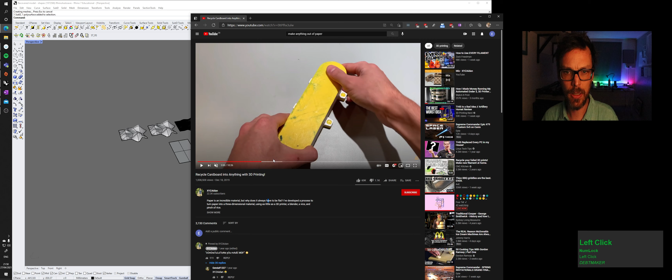I can't quite remember when that is, I think it's a week on Thursday now. So I need to make sure these are ready, and if you do want to have a play with this, then we can certainly investigate it.

Following this guy's video, it's quite informative, one of those simple ideas executed very well. Looking here, he's got a three-part mould: a lid, a base and the sides, and the base is attached with these pins. He's alluded that the material shrinks. We don't know what our properties of materials are going to be until we have a go.

The resolution is pretty tight, you can see the layer lines of those 3D prints coming through, so quite excited about trying this. The other thing he talked about was the thickness, because these things break. But going ahead, we don't really know what to expect until we give it a go ourselves.

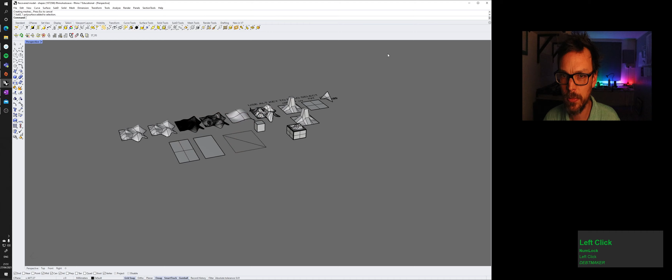So what I'm going to have a go at here is just minimize him. We've got our objects that we played around with in the studio session, so what I might do is another rebuild of that and see what we've got.

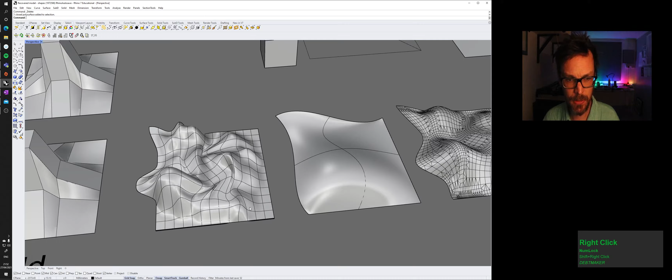I talked about using a shape like this, making it maybe a thickness of 15 mil or so, which is what I've been told. It needs a decent chunky heft to the mycelium in order for it to take its shape. So without further ado, let's just nuke all of those.

I'm going to draw my rectangle, and I'm going to start at 0 and hit it up at maybe 100 by 100. Okay, zoom select, and you can see I've got my shape.

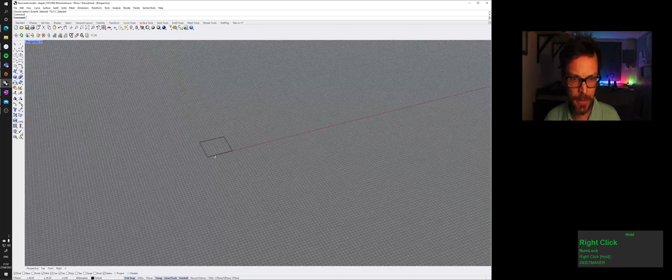Let me just double check with F7 that my grid is the correct orientation, so red should be going along and green should be going up. Again, I seem to be in large objects, don't know why, but nevertheless. What viewport am I in? Shaded. Let's try rendered.

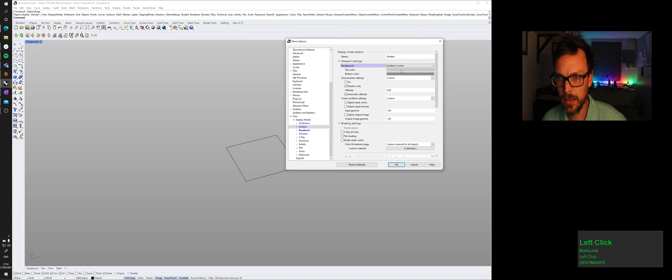Oh yeah, I messed about with these, didn't I? So if I do advanced display, I can change shaded. Let's do gradient, and I'll match the colour of my text down there, my ticker. Was that a top colour? Let's inverse that. Dark grey to green. There we go, let's be super fancy and actually use the right one. Look at that, it's looking good.

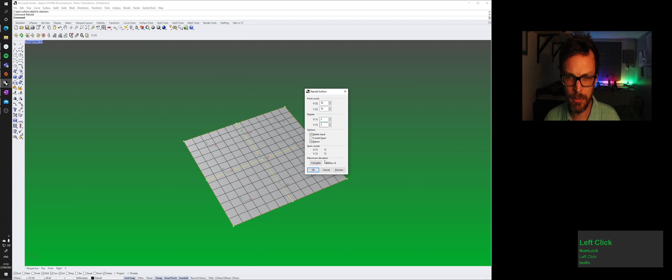Okay, so to get a surface on there, I'm going to use planar surface, and I'm going to rebuild it. What did I use, 16 before, with a degree of 3? The degree 3 will make sure that those curves are nice and curvy. So now I've got my UV curves plotted on my surface.

I'm going to turn points on, which is this guy over here on the left hand side, or I can hit F10 on the keyboard. Again, if you've got a PC, Mac, keyboard or laptop, those F10 keys might be shared, so you might need to use a function key. Going into my different views, we want to make sure that we are selecting the right shape, so I can do that quite easily in the top view, as I am enabled to select.

But if I want to do that a bit more on the fly, I can use the Alt key and click and drag, and that won't select the surface, and I can move those up. Got a bit of system lag there, it's a bit disconcerting.

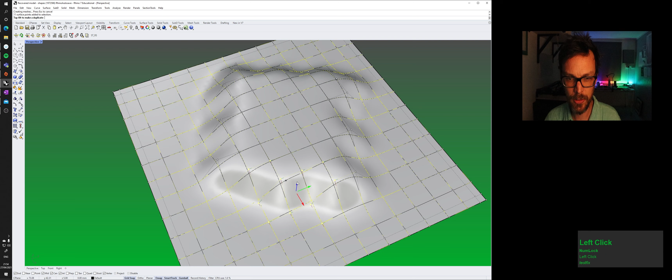Okay, my grid snap is on, so I'm going to turn grid snap off, and that might give me a little bit more. Maybe what I thought was system lag was actually snapping millimeter to millimeter. I'm going to try and keep the edges square. We shall see if we're able to do that using a few different tools later.

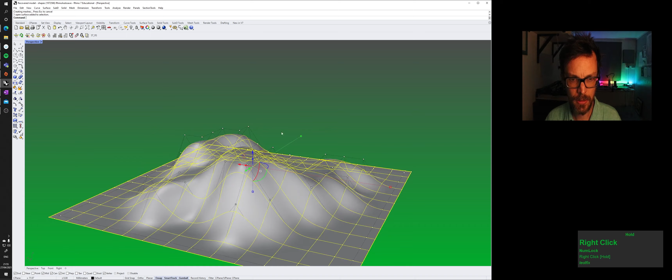Yes, that might work. I don't really know what this is going to look like. Obviously, when it comes to growing the mycelium in it, I've never done this before, so let's see if that actually works out for us.

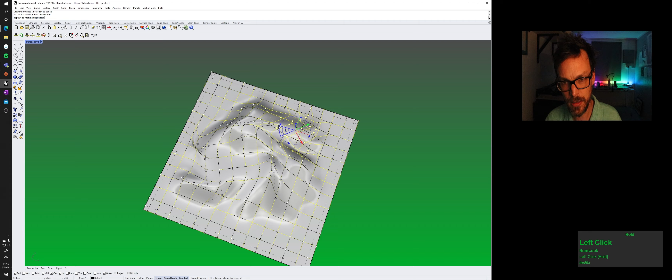The other thing I can do is a few rotations. These look pretty sweet when they've been rotated. Yeah, it's looking pretty tight.

Right, this guy is going to be a problem because you can't really have overhangs when it comes to this process, so drag that out. It's quite alright to have those sharp kinks, keep those in. See how we get around playing with that, and I might want to go down a bit actually in a few of these areas.

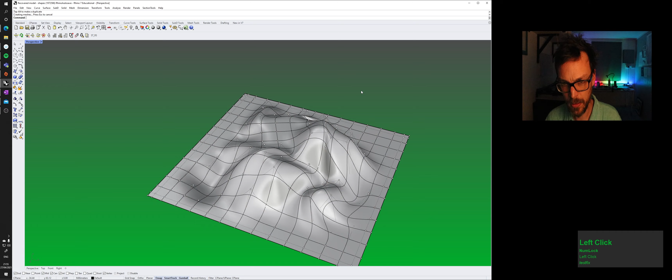So looking back at what we played around with today, we want to make sure these edges are perfectly zeroed. I'm going to select those boundary points by dragging left to right, then make sure they are flat on the Z axis using Transform, set X, Y, Z coordinates, set to Z, and drop that back where they are. Just click on there, and in theory they should be completely flat.

What we might do here is turn the points off with F11, or points off which is right click on the icon. And we can rebuild this perhaps.

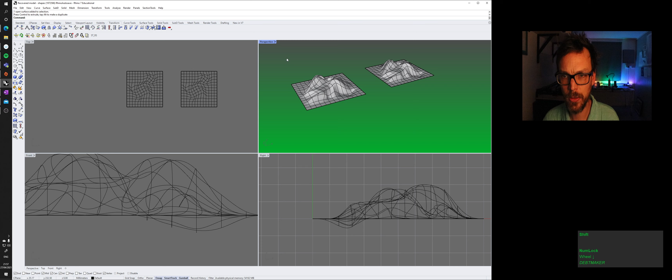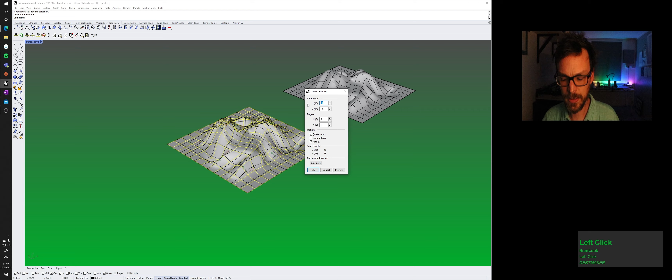So what could I do on this? As I said, rebuild and go from 16 to 8. Oh, we've got that much softer, smoother profiles, which I think both of them have their merits, don't they?

Which one shall we use? I'm going to use this one. I might just have to double check that those edges are flat again after doing that rebuild.

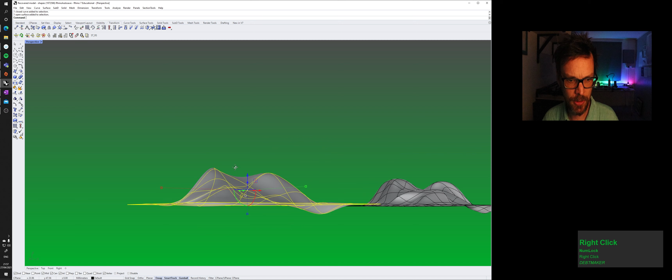Points on with F10. Go into the top view to select. And yeah, I've got those. I'm going to just use the outside edges now, given I've got fewer. Transform, set X, Y, Z, Z, and just bring that down to a point, and they'll be completely flat.

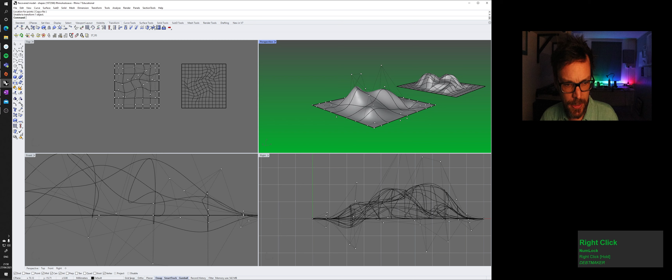Turn grid snap on, and I think I'm going to try a few freestyles here and see what happens. So I'm going to draw a cube, 100 by 100, and maybe this is going to be, well, they're only what, 2 mil high? No, they can't be 2 mil. I wonder what the unit is. 10 mil. So this is approximately 20 mil high.

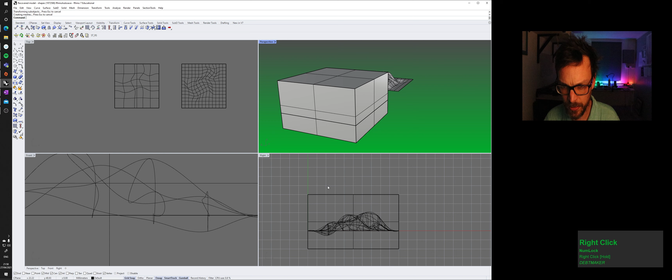So let's make a box 40 mil and bring that down so it's in the center. I might actually have to bring that top layer up. If you look at those keyboard commands, it's Control Shift left click to select the face, and I'm going to drag that up because we've got a bit more depth on this base here. It's a pretty chunky object, so we'll see how it goes.

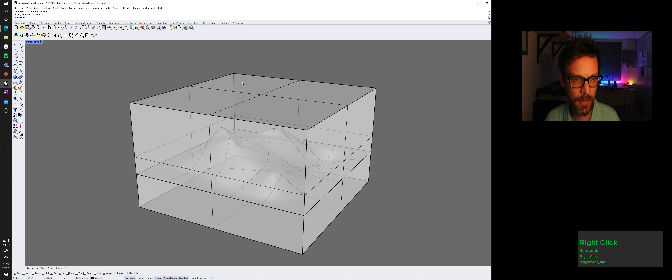What I need to do now is do a split. I need to split this. I'm going to hide him because he's now in the way. I'm going to split this cube with this surface, and again I might change my viewport to ghosted now in order to gauge what's going on here.

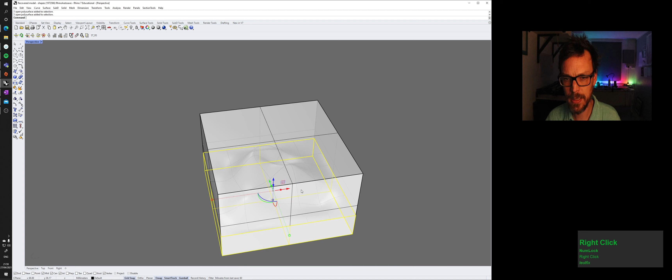Let's try a split over here. Objects to split is the cube, and the cutting object is going to be the surface. Did it work? It flipping worked. The only reason it worked is because I made the cube exactly 100 by 100 in X and Y, and in fact I did it endpoint to endpoint, didn't I? These things have to be completely intersecting. Intersecting means if I run the intersect command, press enter, we can see we've got those 4 edges all the way around.

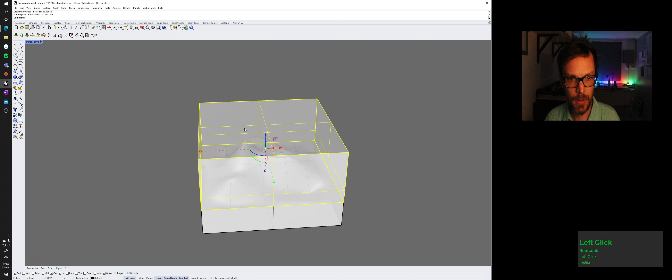So let's just split that again. What I'm going to do here is maybe move that to there and that to there, and I'm going to copy that shape to there and that shape to there. I can delete the original. Oh, no, I won't delete the original. I'll put it over here and hide it. And what I've got now is a male and female.

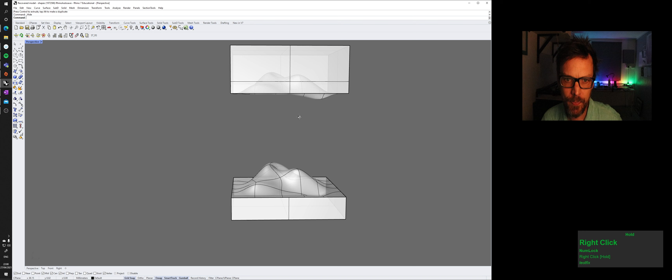However, if those go to join, my objects aren't going to have that thickness that they need. So what can I do here? I guess I could put my object there, and I know my grid snap is 10mm. Otherwise I can use the gumball and just drag it up and type in 10.

Could do another trim. Select cut... oh, I just do a trim now. Sorry, I got confused. Select cutting objects, going to be my surface. Trim off the base. I probably didn't need to do that, did I? I wonder which.

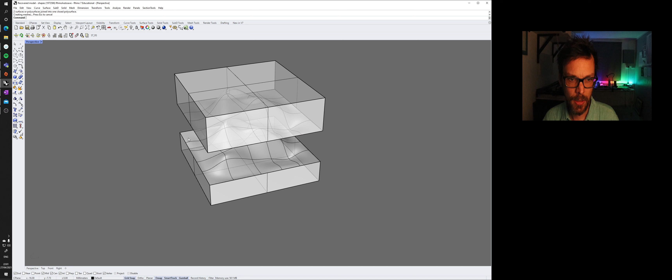Okay, and then what do I need to do? So I've got the bottom part of my mold box, J for join. Top part of my mold box, J for join. I need to create something that allows me to actually press it into it, don't I? So I need to create the walls.

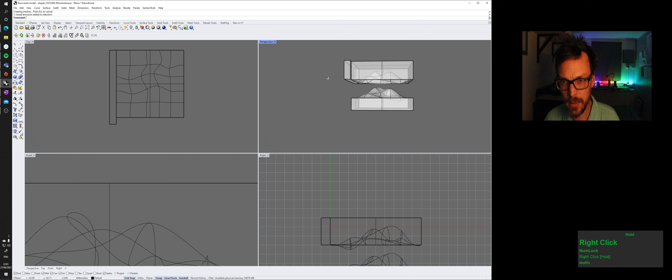So if I go and make the walls, maybe I use the top view, like that, to the height. So I'm kind of just... can I rotate that from the center?

God, copy. Forgot to do copy. Center of rotation. Come on. Copy, yes.

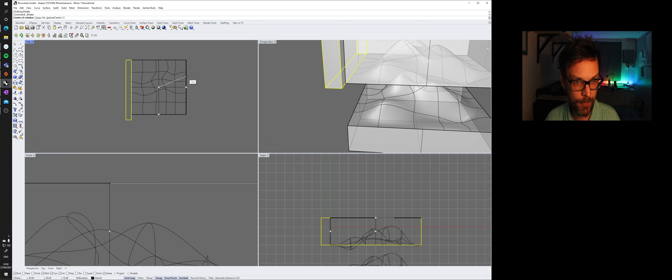Okay, we've got two there. Yeah.

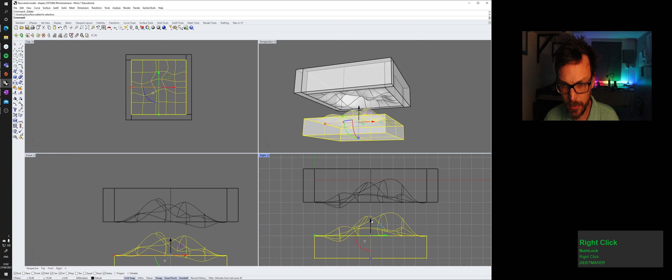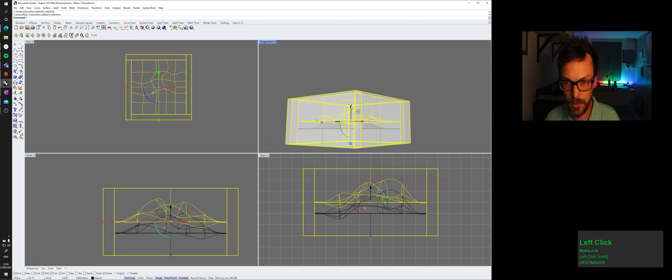So I've now made my walls. If I was to drag this up to be the right thickness, I can again use Shift Control left click to choose those edges, and drag that down to the base, then do a Boolean union on the relevant parts. Don't know if that was the most appropriate way to make that, but that is what I ultimately needed, so it seems to have worked out okay.

I could tell you a different way of doing that - I could just do a Boolean difference with a cube. I'll try again a different way. Need to do a merge. What is it? Unify, okay, merge all faces. Merge all coplanar faces, that's what we need to do.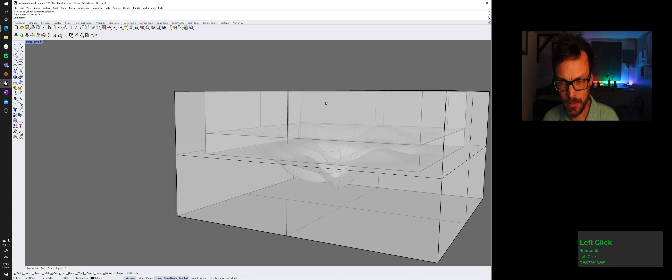Let's just tighten that up. So what we're going to have here is this object is going to get plunged down into there, and the void, once they're flush, is going to go into a 10mm surface, hopefully. The other thing the guy had was a base, wasn't it? So I can do a 5mm base maybe, if I can actually use the computer. So that's 10mm.

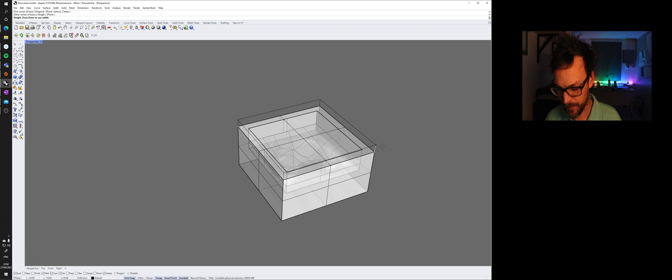There we go, and then I can do a Boolean union on these two shapes, like that. So that's going to just have a nice surface to connect to, and with it being completely square, I probably don't need those pins, because this thing is hopefully going to slot in. Now, depending on the machine that we're going to use, the tolerance of this fit, at the moment this is exactly the same.

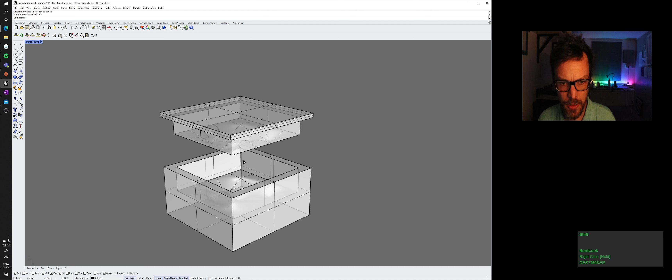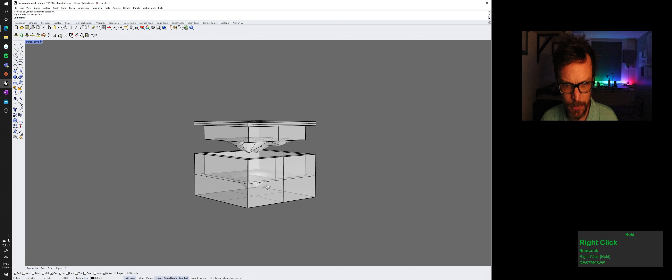I'll be very surprised if I print this off on the Ultimaker and have them both fit perfectly into this object. I'm a little bit anxious that this thing is so dense, but let's see how that works out. Later we could probably be a bit fancy with that, but I think that's going to look okay.

Right, here, rendered, got my object, got my mold box, positive and negative. As I say, I'll be amazed if this thing actually goes together.

So what I might do here is a little cheeky - in software, it's called a draft angle, where you'd actually have this angled in a little bit. And what I'm going to do here is use a plane that covers the... oh, where's my shape?

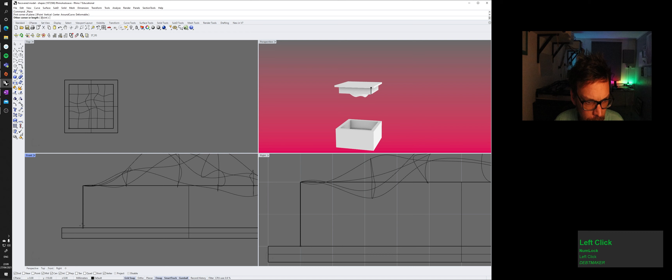This piece. Let's make sure it overhangs everything, and I'm going to rotate that from here, maybe -2, which is probably enough, or maybe -3.

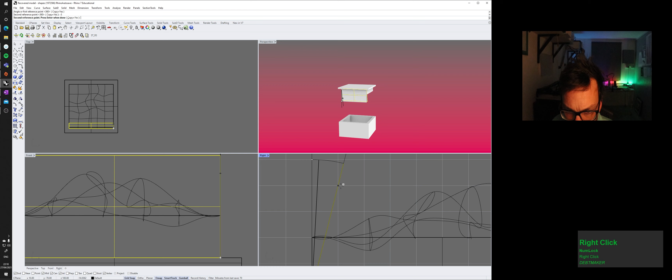As you can see, that was the original one, and this is the new one, and that actually intersects those edges there, and it's got a bit more complex now. I appreciate that. I'm going to rotate it around the center again, 4 times. Copy, yes.

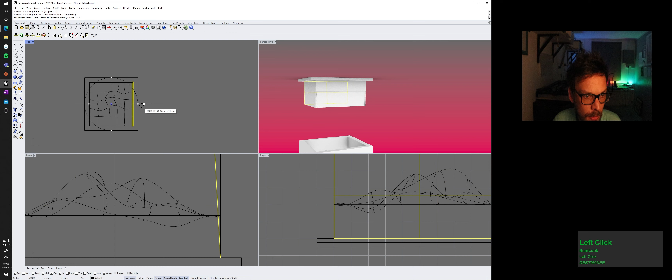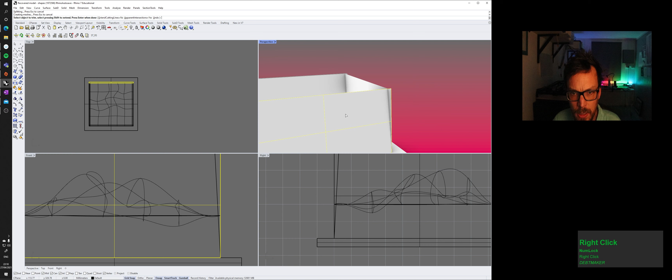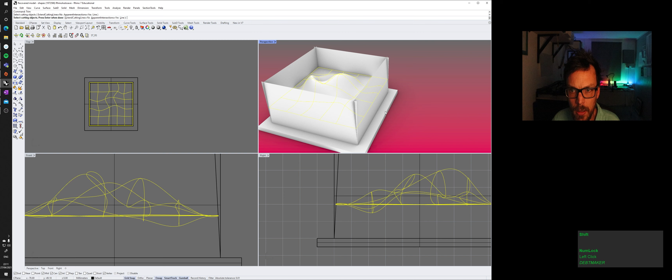That's the original one, isn't it? So select that shape, the angle, trim away my object. And now I can select my - can I do a J for join? And then trim. Okay, so I've got those shapes, and I just want to delete those top pieces.

Not working. How come that's turned to that? Is that because I did a J for join?

Yeah, okay, so I'm going to save this now, because I've forgotten to save it. It's going to be called mould box or something. And saved, good. I'm going to trim.

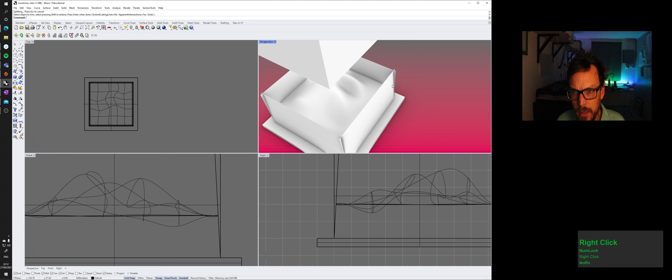See, it won't do that because at the moment this is bigger than the surface, so I'm going to delete these. I've got my floating object, which is now a few millimeters - you can see in the top view, a few millimeters smaller than that surface edge.

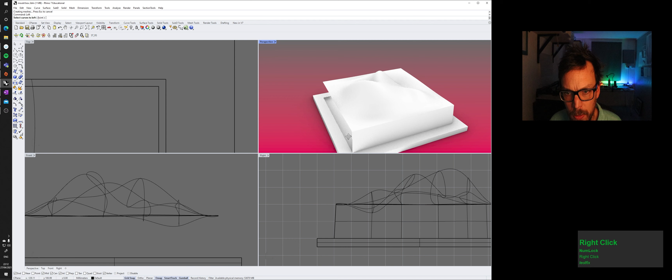So what I'm going to do here again is a loft and build those surfaces back up. It was a bit faffy, I appreciate that. There's probably a better way to do it, but this is the one that I can think of right now, and maybe this is the best way, I don't know.

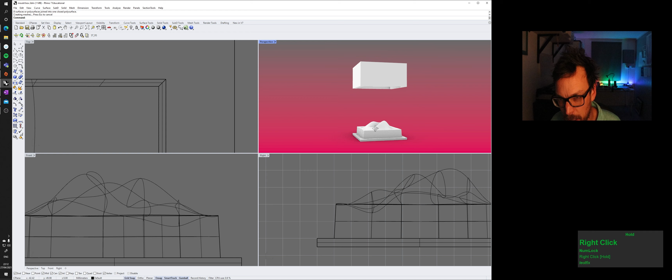It's going to work anyway, I imagine, unless obviously we experience something a bit weird with our mycelium structure material that I don't know about because I've never used it before.

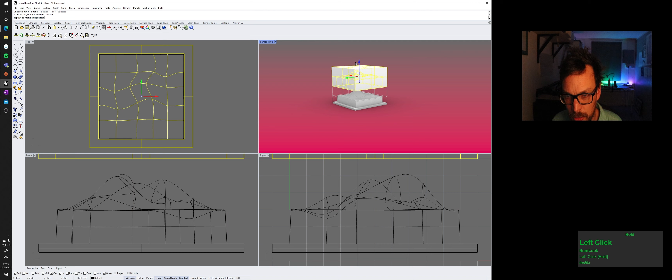Drag that back down, put it back on 0, zoom extent or zoom selected, right click, and there we go. In order to get this to print, I'm going to export this accordingly.

As an STL file. Mould box base. Mould box lid.

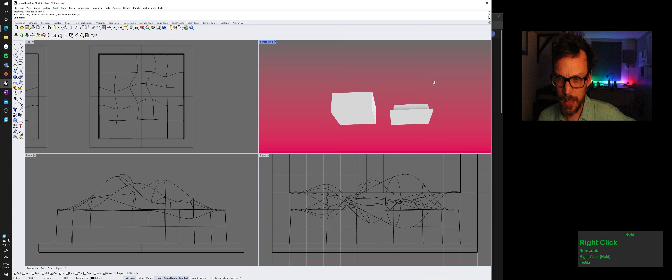Do you think I should scale mine back a bit? Let's see what it says in Cura.

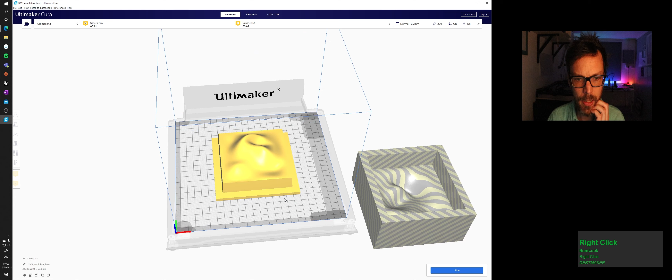That's very bright. Okay, so open this - mould box base, mould box lid, open. Holy moly, this thing is huge.

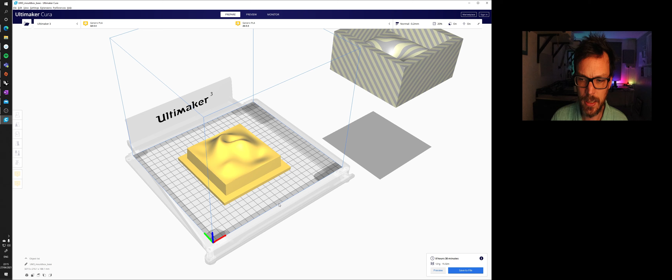So I can only do one at a time, which is a bit of a bother. So again, if you guys want to play around, maybe make this half the size. I think you do need a bit of the Z depth, so that's going to still be retained. This is going to take forever, 8 hours. Yeah, so this is an overnight print just for the flipping lid.

So back to the drawing board. Can't have that. Alright, so let's do some quick changes.

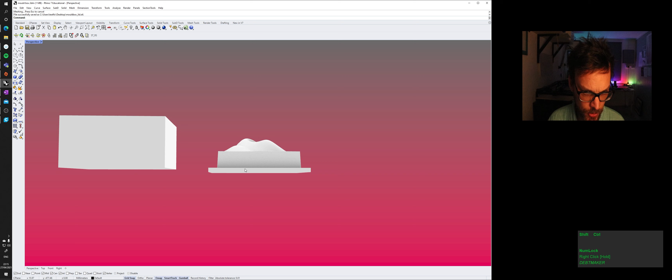First things first is I'm going to press Ctrl Shift and select the base and the bottom of the walls there, and I'm going to bring that up 15 mil. Is that right? And I'm going to select Shift, click that, and I'm going to drop that by 15 mil.

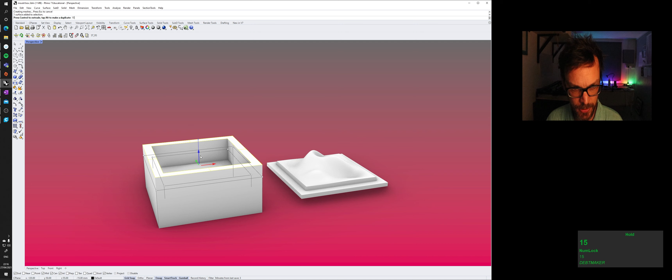So in theory, if I move that onto there, our object's still going to look pretty much the same. Yeah, okay, that'll work. And then I've got around 9mm here, and a lot of negative space there. So I wonder what can I do to get rid of that?

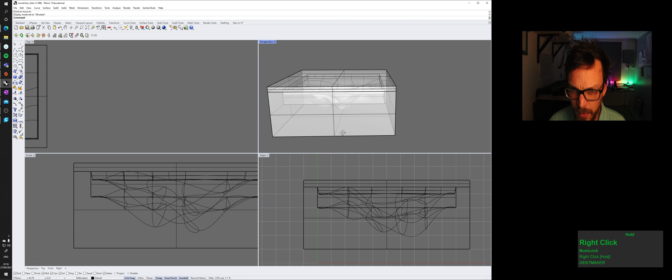I suppose I could design something that doesn't have a giant, whatever that's called, right over there. You know, I probably could get fancy and try and delete some negative space, but then ultimately we do have to have this thing attached to the base, sit on the floor or get squashed in a clamp. So I'm just probably going to keep that. So let me rotate that back out.

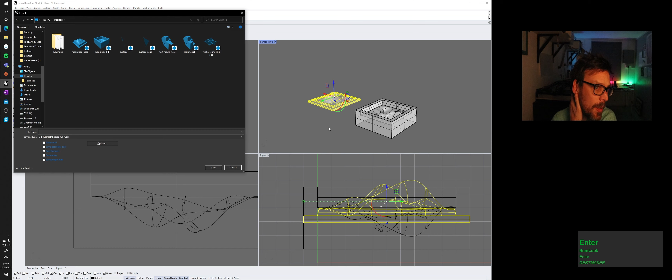Export base. Yep, replace. Okay. Export lid.

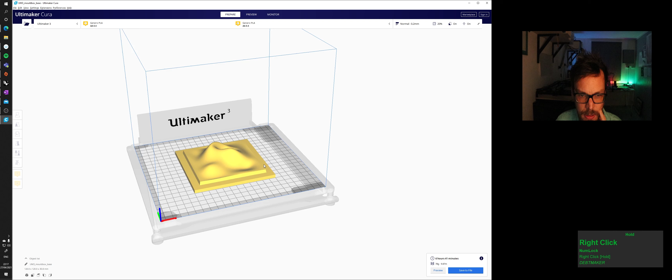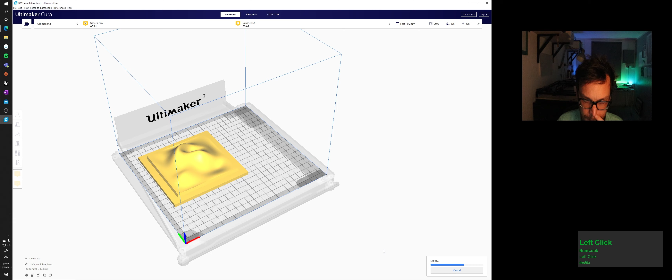I think I've got to keep changes there, and slice again. So I lost some resolution. 6 hours. The thing is, though, look at it. It's 10:30. It doesn't really make any difference to me because I'm going to be asleep, and this thing can be running overnight. All being well, so maybe I want that resolution.

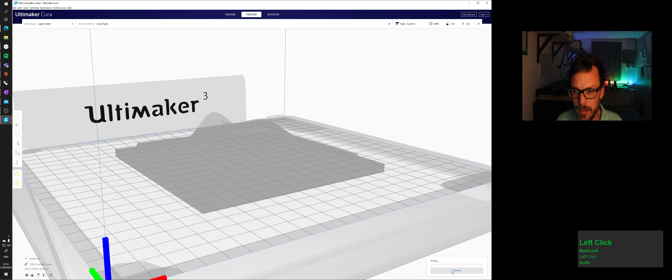Let's see what the preview looks like. Oh, didn't slice it. Oh, it's because I moved it. Well, it looks good. Let's just save this out.

Mould box base, and let's bring in the other one. Let's see actually if I'd have got a 0.8 nozzle on there. Keep changes, slice.

You know, looking at 3.5 hours. So if you were doing this in the studio, that could be set up in the morning. You could have it off by after lunch. So it might be worthwhile exploring the different nozzle sizes.

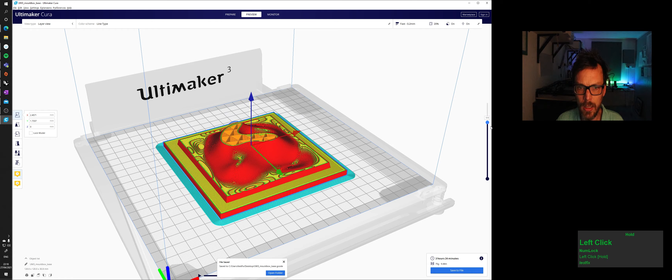And ultimately, when it comes to the previews, when you've got it at 0.2, that is really going to be quite indistinguishable from a 0.8 to a 0.2, because it's all down to the layer height. Okay, in this instance, I really don't think you can have much of a problem there.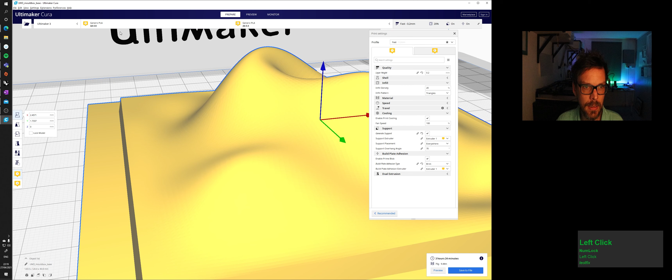So I'm just going to change that back because I don't have a 0.8. Actually, I might have a 0.8. I'm not going to experiment tonight because it's too late. So reslice and save.

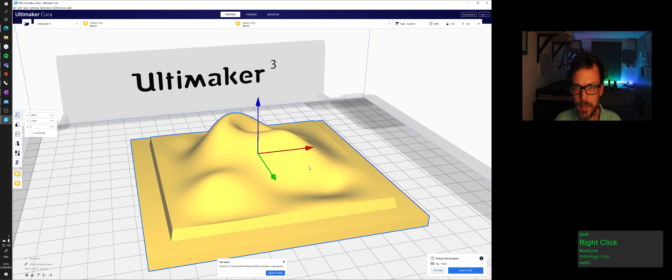Save to file. Mould box base. Yep, just save it. I don't know what I did. Okay, so I can kill this model - not person, goodness me - and choose the lid.

Slice. Wow, 11 hours. So that's going to take me to what, 9 in the morning. It is a bit extreme.

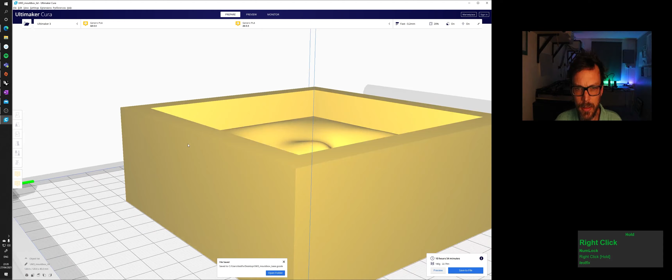Don't know what to say really. 180 grams. You know, and it might not even work. You know, it does. What's that? 40 layers before it even gets to the actual object. Creates the negative shape there.

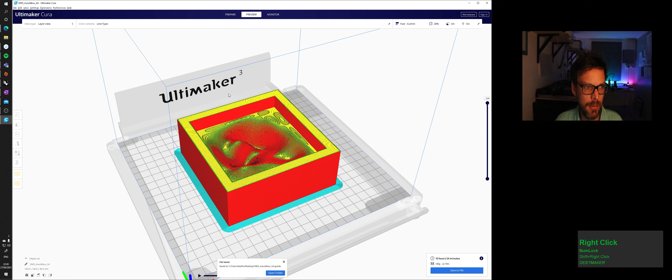What do you reckon? Probably going to go for it. Save. Save. Pretty much concludes that. So fingers crossed that's going to work out okay, and we can have some cool models to show.

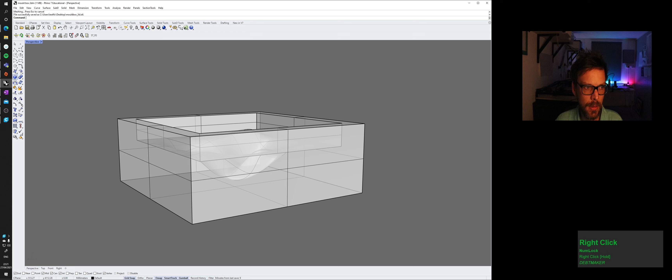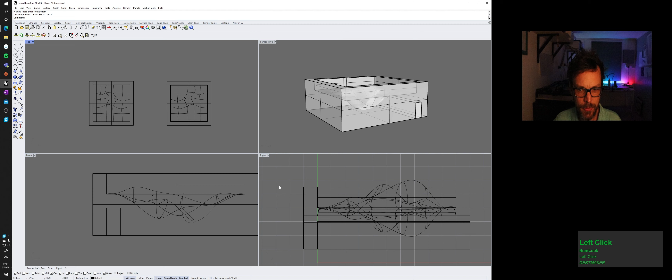I suppose if I was to really try, I think where's the lowest point? It's here. Because even if I was to mass out some volumes to get rid of this much stuff, do a Boolean difference there.

The way that the printer actually does its job, you probably wouldn't save much time or material. So, but that said, there is going to be a difference, I think.

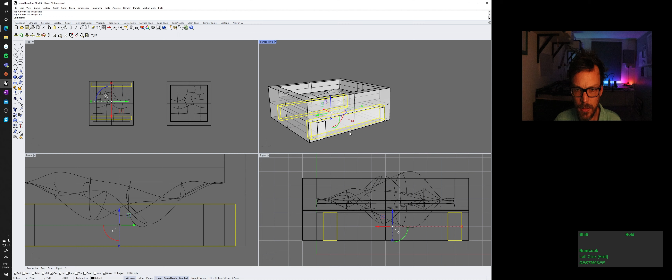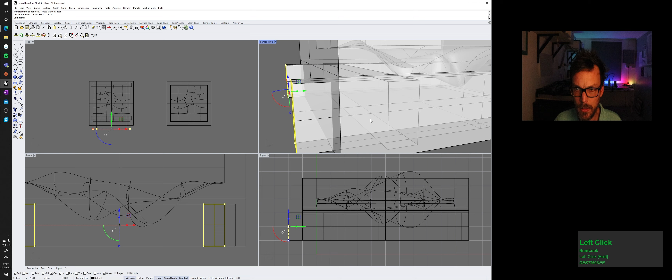Rotate and Alt. Oh, flipping didn't extend it all the way. So as long as they extend all the way through, you'll be okay. And does that intersect with my geometry, or have me? How close to it is it?

Difference, subtract from this guy. As I said before, let's not make any rash decisions here. Always make a copy. Subtract from this shape, delete input yes, with 1, 2, 3, 4. So I could have something like that.

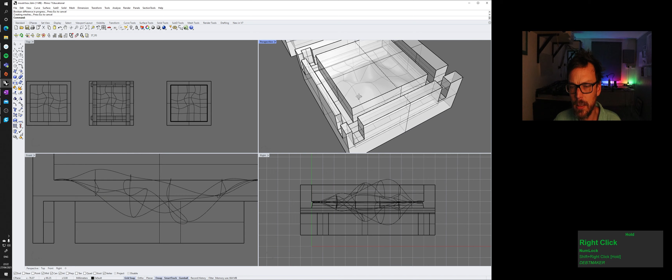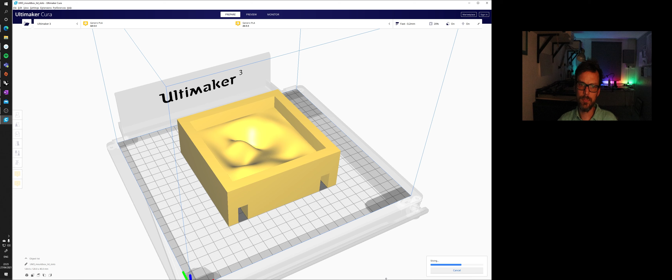Let's just see. It's a bit crude, I don't quite like how it looks there. Lid with slots. Was the last one 11 hours? It's gone up. As it put support material on. It has, let's change that.

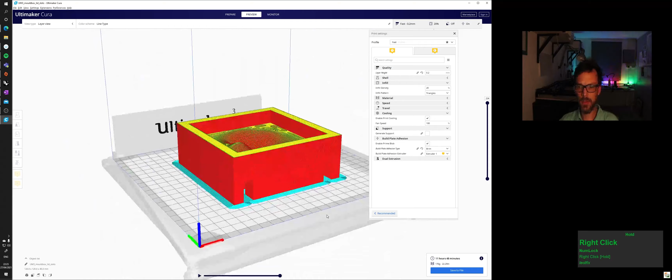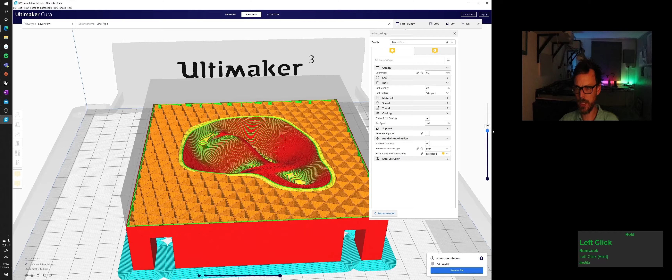Exactly the same, you see, even if I'm using only like 10 grams less material, because the reason being is that when it goes down here, it's going to do all these extra lines, which are perimeters. Okay, so it thinks the perimeters are important, it slows down for those, so it actually slows down for the red, whereas before, when it was a solid orange, it can go at full speed on these interior objects because it doesn't really matter about the finish on the inside shapes. So yeah, didn't really gain anything there, wasn't really worth a try.